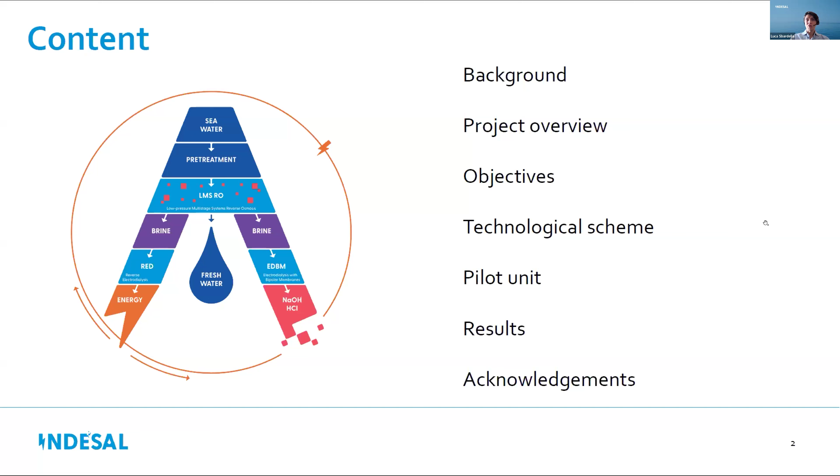I think in the context of today, most of us are well aware of the background of this and the need for a desalination project like Life INDESAL, due to increased water demand and the water scarcity we are facing in different regions of the world. We also know that there are several unconventional water resources that are becoming more conventional, let's say. Among them, desalination and seawater desalination is one of the most robust and efficient processes to supply fresh water.

In this framework, INDESAL aims to increase the seawater desalination sustainability and circularity. How do we plan to do that? By integrating three different innovative technologies.

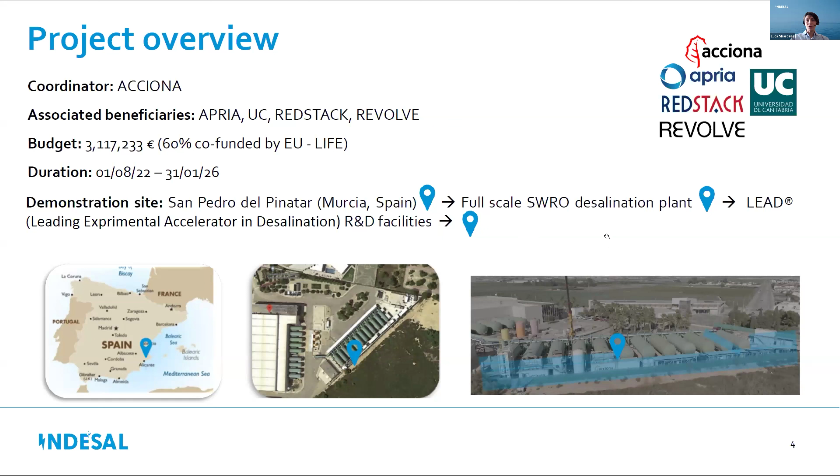In this slide, we can have a brief overview of the project. There are 5 partners. Acciona is coordinating, and with our company we are joined in this project, in this adventure, by Apria, University of Cantabria, Redstack, and Revolve. The demonstration site is based in the southeast of Spain, in a desalination plant operated by Acciona, where the innovation department of Acciona Water Business has its own R&D facilities with several pilot plants, among them the Life INDESAL.

So the main objective is to improve the efficiency and the circularity of seawater desalination with a novel integrated process. This process has, let's say, 3 pillars, each of them associated with a specific objective. So the first pillar is to increase the energy efficiency of seawater desalination, and the technology is the low pressure multi-stage reverse osmosis.

Some of the main features related to them: we have the LMSRO, which is basically a 2-pass multi-stage with shorter pressure vessels, which results in better flux distribution and also a more flexible and tailored CIP, so cleaning in place.

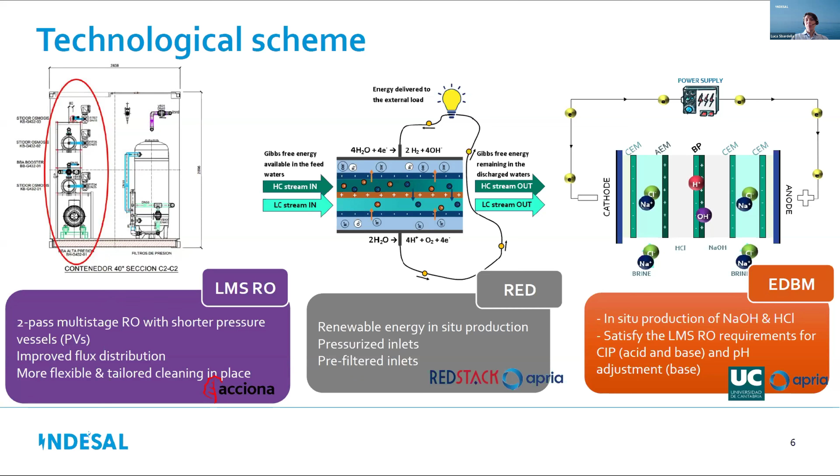We can have an in situ production of sodium hydroxide and hydrochloric acid to such an extent that allows us to satisfy the requirements for the desalination process, both for the CIP and also for pH adjustment.

So these three technologies, which I have just mentioned, are integrated together in a pilot plant which is highly flexible and modular. It's basically composed of two containers, a 40 feet and a 20 feet container, which are highly equipped and instrumented, and can be operated in such a way that allows us to obtain results representative of a full-scale desalination plant.

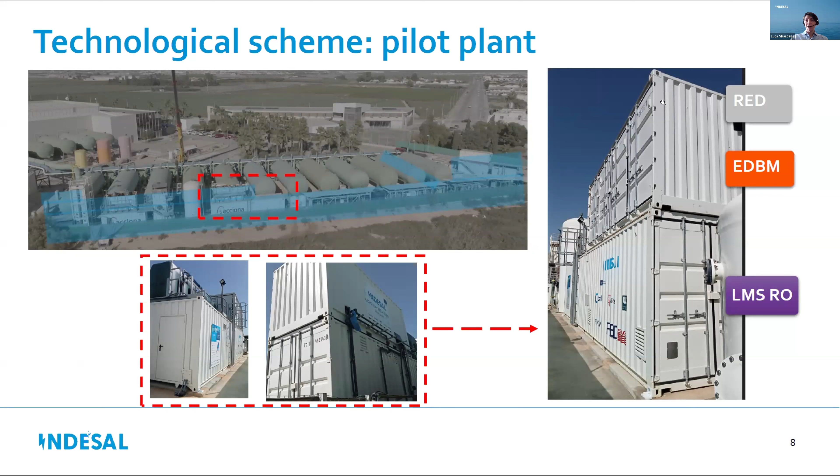In the first picture here at the top, we can see our R&D facilities, and in the red dotted box below, we have the INDESAL containers. In the bottom one, as we can see here on the right, we have the LMSRO. It's a 40 feet container, and in the upper one we have the other two processes, the RED and the EDBM.

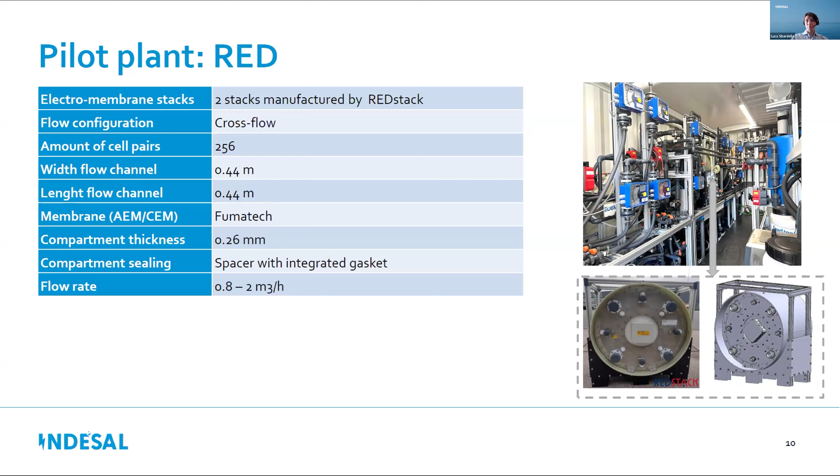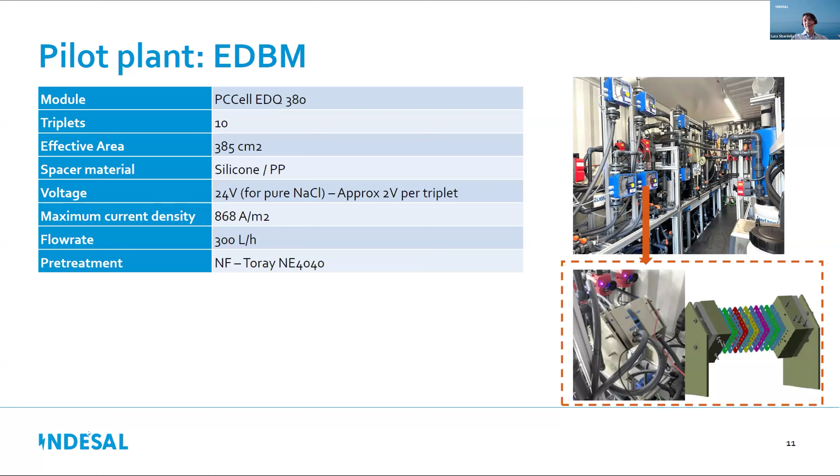Finally, as you can see, the picture of the inside view of the pilot is the same, because as I said before, the RED and the EDBM are located inside the same container. But in this case we have also the detail of the EDBM module, which is a PCCell module with 10 triplets and an influent flow rate of 300 liters per hour. So as we have seen, the highest flow rate is for the LMSRO, the intermediate one is for the RED, and the lower one is for the EDBM.

Once we had a look at the technological characteristics of these three pilots, we can look at some of the results achieved. In the case of the LMSRO, we treat Mediterranean seawater, which is properly treated by the pretreatment of the pilot, which is pressurized media filters, providing proper LMSRO influent quality with a turbidity and SDI15 complying with the characteristics needed for proper LMSRO operation.

Anyhow, we can achieve, from February, March, through the whole year the pilot was operated, very good quality permeate with an average of around 200 ppm of TDS.

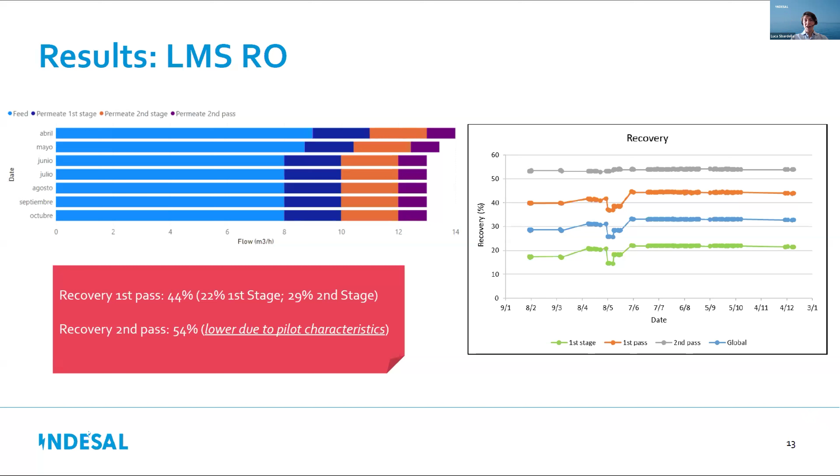As I said before, we also wanted to highlight the highly balanced performance of the LMSRO. As you can see in stage 1 and stage 2 of the first pass, we have almost the same flux on average. This results in highly balanced hydrodynamic conditions and also less energy losses. At the same time, we were very satisfied with the performance of this first pass LMSRO, which presented a very stable performance.

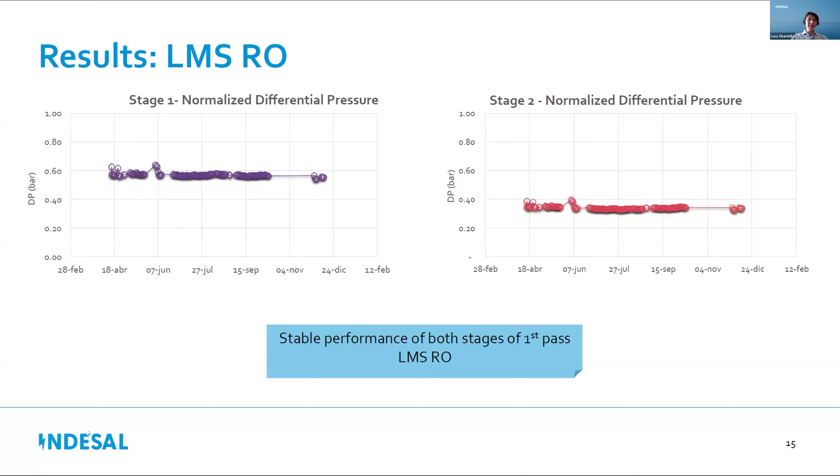So once we have seen the LMSRO results, unfortunately we cannot properly share continuous results from the other two technologies because at the moment they are not continuously operating. But it's anyhow interesting to see some of the preliminary results at lab scale, and also simulations, which were needed to achieve the final pilot plant design.

In the case of the RED, Redstack, who is the partner in charge of the design of these pilot units due to their expertise in such systems, has been evaluating different process operations with the aim of maximizing to the possible extent the energy efficiency of the process, and of course the power density as well.

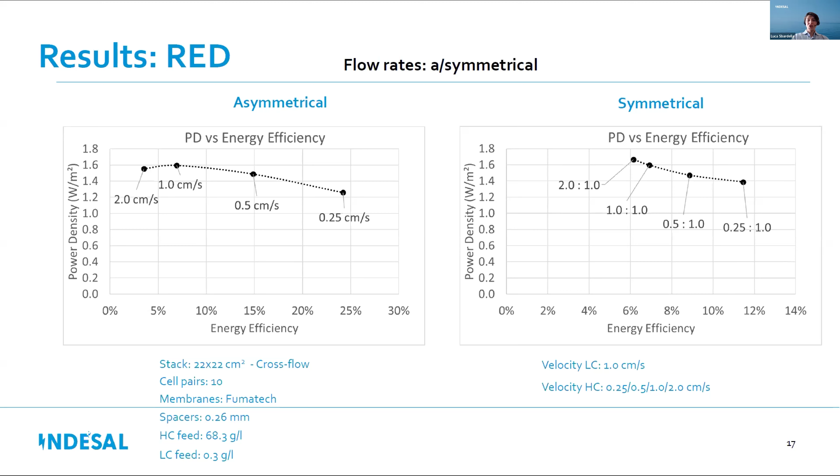These lab scale results were carried out in order to gain valuable insights for the follow-up task, which is the construction and design of the already pilot unit.

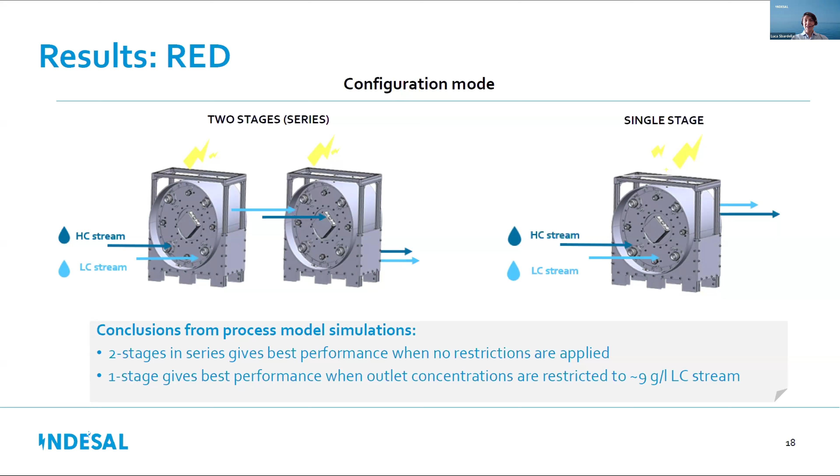And from this preliminary study, together with the associated simulation, we built pilot plants flexible in terms of configuration mode, which can be operated in 2-stage and also single stage. This is because we saw from the preliminary simulation results that the 2-stage configuration gave the best performance in terms of the energy yield achievable, while the single stage process can also be useful if we want to restrict the low concentration outlet of the RED process.

At the same time, this pilot is also designed and built in order to operate in recirculation and feed and bleed mode for the electrolyte rinse solution, because the idea of the project is also to achieve maximum energy with minimal or no chemical consumption at all.

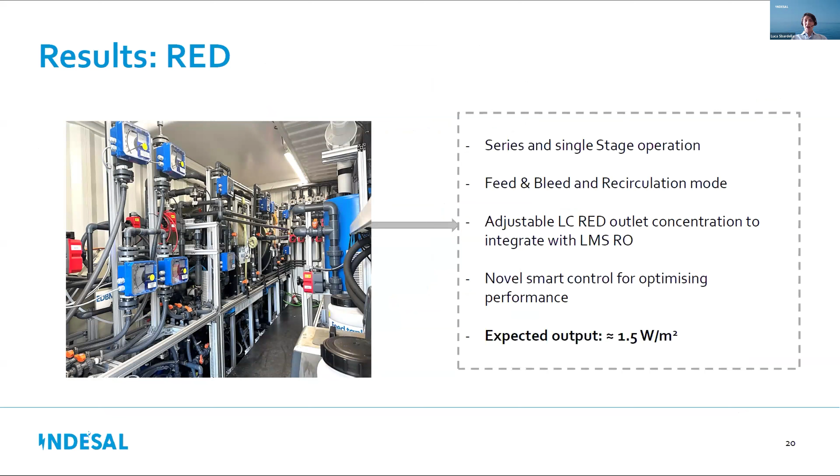So finally, the RED pilot has different and alternative operating modes. It also incorporates a novel smart control system for optimizing its performance, and we have an expected output of 1.5 watts per square meter. The similar context for the EDBM.

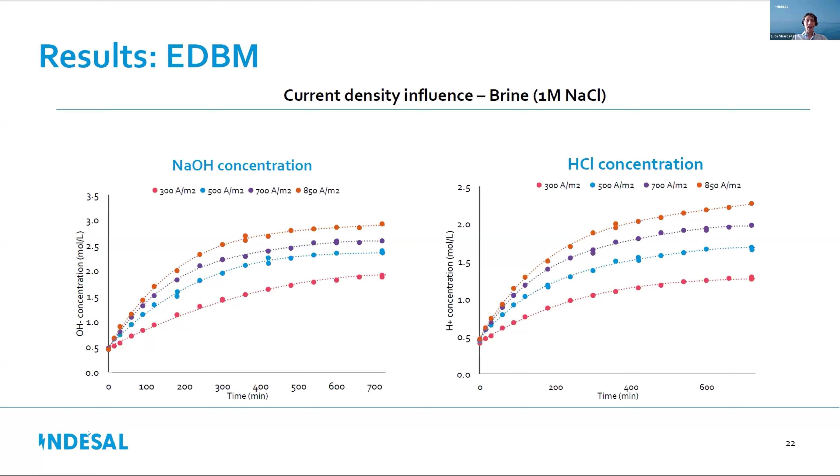Since this pilot is meant to be operated in a semi-batch way, we also have the advantage of operating at constant voltage, which in the case of 850 amps per square meter, we are at around 20 volts.

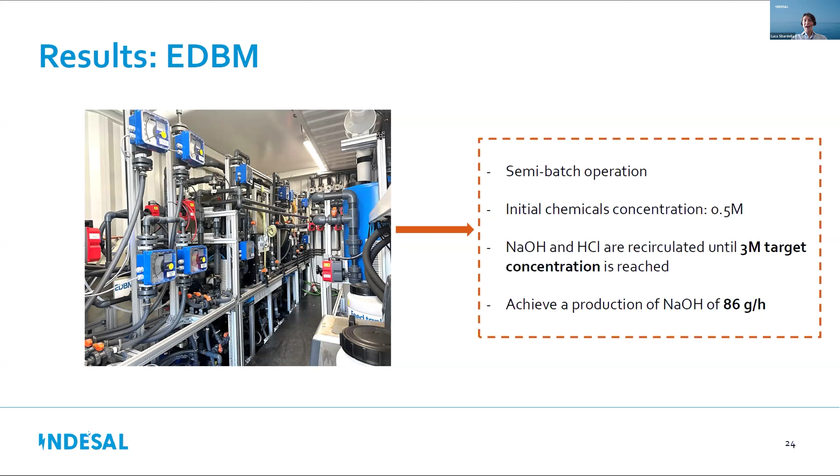So finally, the EDBM can operate in semi-batch mode. The idea is to start with an initial concentration of 0.5 to achieve a target 3 molar concentration, mostly for sodium hydroxide, and a production of 86 grams per hour of the alkaline stream.

Getting to the conclusion and some of the expected results from the pilot plant operation, we expect a specific energy consumption reduction of 0.2 kilowatt hours per cubic meter when we compare the LMSRO system with a conventional 2-pass seawater reverse osmosis desalination system.

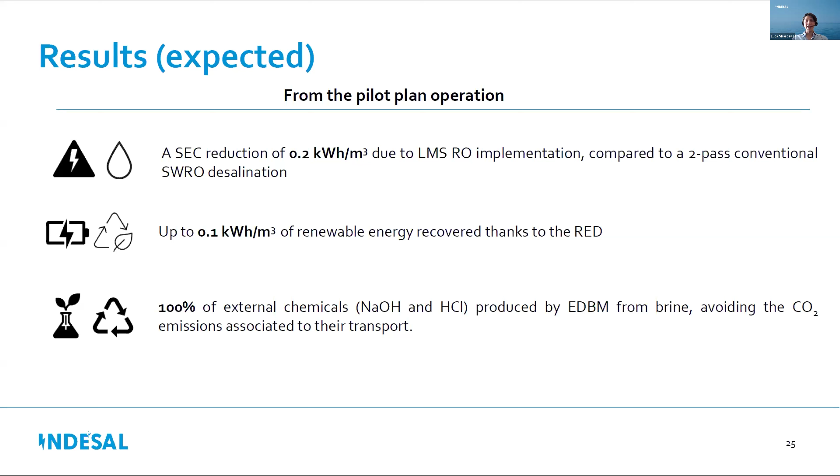We expect to achieve up to 0.1 kilowatt hours per cubic meter of permeate of renewable energy due to the RED, and to completely satisfy the need of sodium hydroxide and hydrochloric acid for the proper operation of the pilot, thanks to the EDBM process.

If we translate these results to a full-scale desalination plant, we will have a reduction of 33 gigawatt hours per year and the associated reduction of CO2 equivalent emissions, the production of 16 gigawatt hours per year, and a reduction of almost 4,200 tons per year of chemicals due to the brine valorization through the EDBM process.

First of all, don't panic, I'm not going back to the time of the ancient Greeks, despite my first slide. But I would like to remark that salted water has been one of the issues along the whole of humanity's history. Of course, the main technology was different stages of distillation processes, from the lower scale for villages, boats, etc., to the full scale that appears in the year 1930 in Saudi Arabia, in which the first big multi-effect desalination plant was built.

Following that, in the meantime, the United States Congress passed the Saline Water Act to support the funding of desalination in 1952. And in Qatar, the first desalination plant was built in 1954.

And what happens in the early 60s of last century? At the University of Los Angeles, Sidney Loeb and Srinivasa Sourirajan discovered that cellulose acetate film can separate salts. They found initially by chance that the cellulose acetate film covering cigarette packets could separate salts.

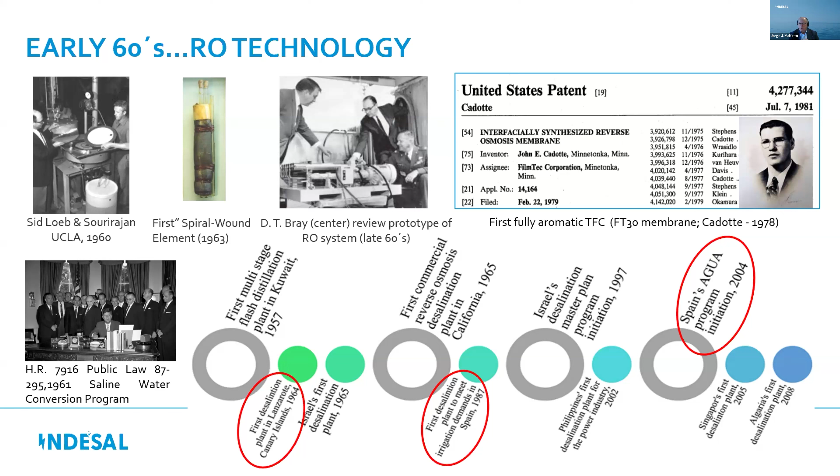If we follow the technology in Spain, which is the European country where reverse osmosis technology was first developed - as I said before, in 1964 the first desalination plant was built in Lanzarote.

In the 80s, desalination plants for irrigation were built. Construction of these plants continued through the 90s, and between 1995 and 2000 there was significant growth in installed capacity.

And in 2004, the AGUA program started. The current situation is more than 24 big desalination plants from the AGUA program working, and now we are starting to update these plants and increase production by expanding these installations.

This is the situation now in Spain: more than 765 desalination plants between brackish and seawater. 99 of these plants produce more than 10,000 cubic meters a day - 68 seawater and 31 brackish water. The biggest one is in Torrevieja, in Alicante.

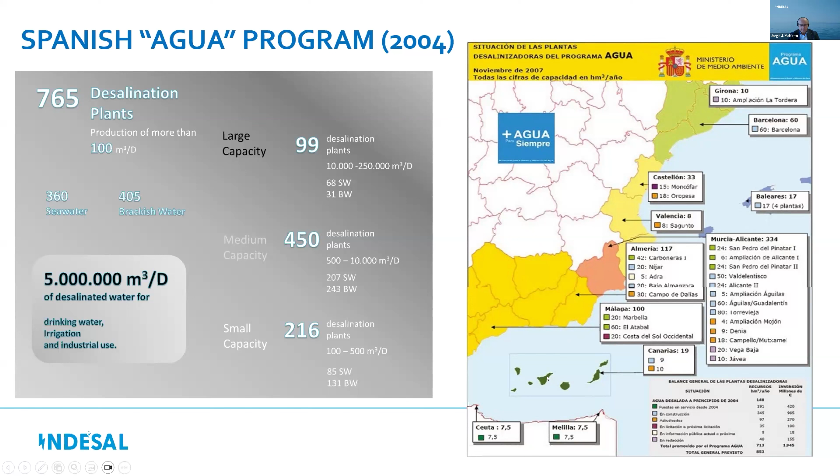Talking about desalination in the world, at this moment the predominant desalination technology is reverse osmosis. The Middle East countries traditionally built very big thermal desalination plants - multi-flash distillation, multi-stage desalination plants. But since 5-6 years ago, they've been changing to reverse osmosis, which has boosted the reverse osmosis market.

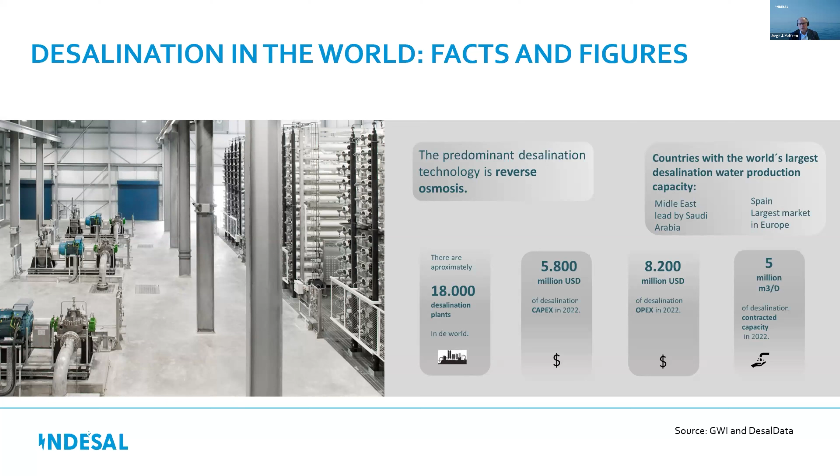For this reason, the Middle East leads reverse osmosis production, led by Saudi Arabia. Spain remains the largest market in Europe. In the world, there are more or less 18,000 desalination plants with a CapEx of 5,800 million US dollars, and OPEX around 8,200 million US dollars.

As you can see in the slide, membrane technology is predominant in the market. Thermal technology is still in use, but all new projects are focused on reverse osmosis.

They were awarded from the mid-60s to 2024, where around 110 million cubic meters a day were awarded worldwide.

Maybe the main issue is that the latest projects are huge capacity projects. At the beginning of this century, the biggest projects were around 100,000 cubic meters a day, up to 240,000 cubic meters a day, as in Torrevieja.

But now they are building plants of 900,000 cubic meters a day, or 800,000. So very big projects. The latest major project is in Casablanca, Morocco, where Acciona is going to build an 830,000 cubic meters a day seawater reverse osmosis plant.

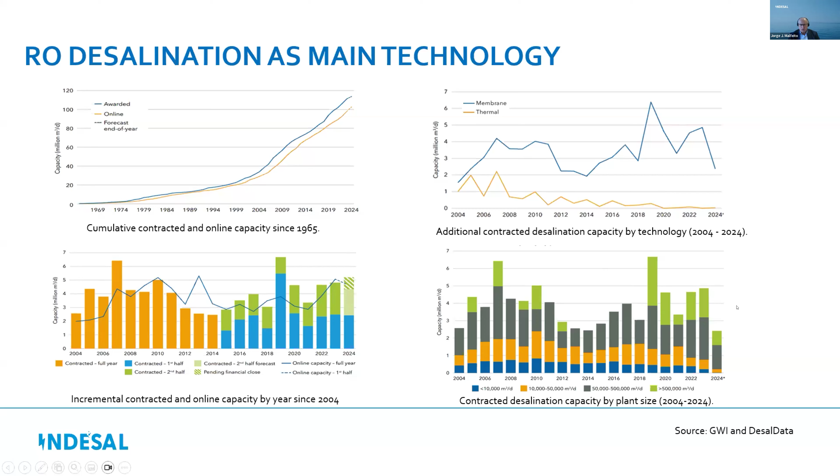If we analyze the cost of MENA projects in terms of price and specific energy consumption, we see a great evolution in water price. We come from 1.2, 1.3 dollars per cubic meter in the early century, to prices in 2024 like Saadiyat in Saudi Arabia, around 0.72 dollars per cubic meter, or Casablanca, about 0.46 dollars per cubic meter.

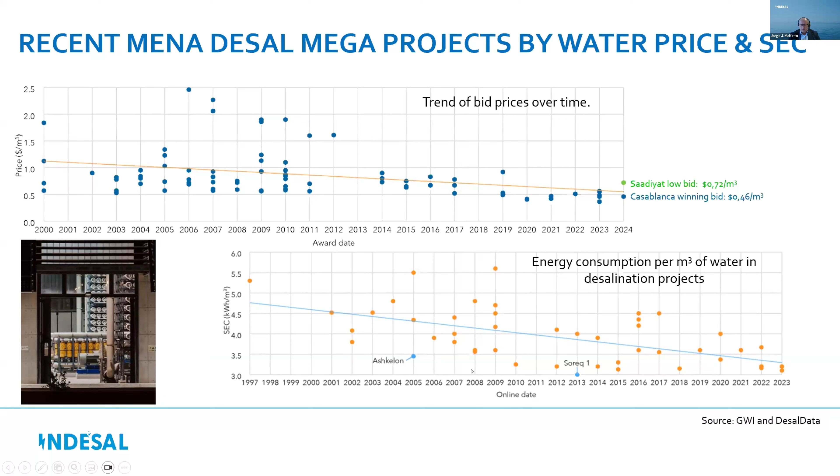What about innovation trends? At this moment, innovation in desalination and reverse osmosis in general focuses on producing higher flux membranes with higher recovery rates. Of course, economies of scale play an important role.

Achieving these prices is only possible if we build very big desalination plants. Also, new process configurations can help minimize costs. Application of renewable energies, addressing biofouling, brine concentration, mineral recovery, and digital innovation are key.

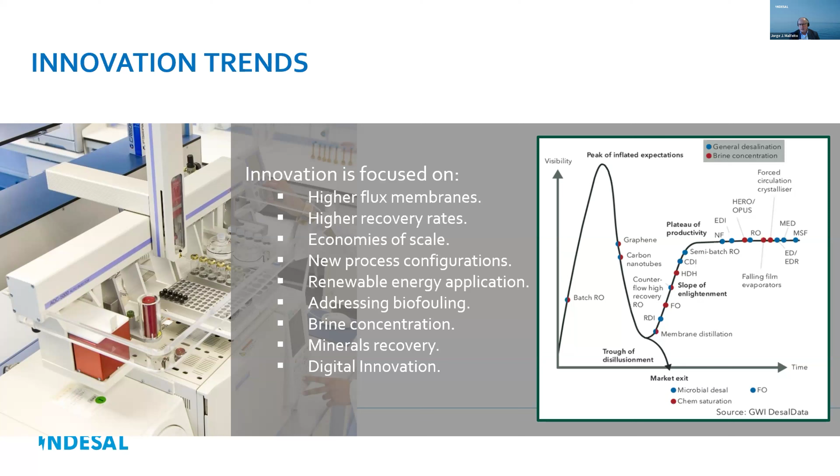This is one of the focuses that all the companies are working on. Digital innovation is also going to play an important role in the near future.

And I think this is all. Thank you very much for your attention, and I'm open for your questions.

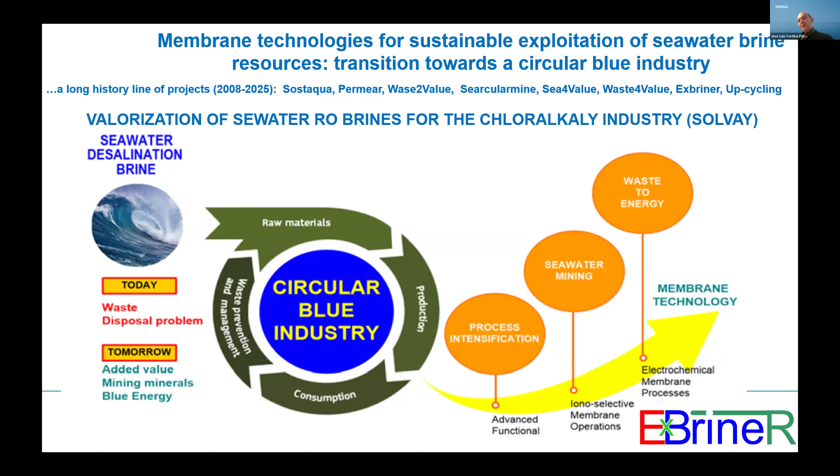I was reviewing that maybe we are prisoners of this, or maybe it's because we love brine valorisation. For example, we have this new Marie Curie program project for PhD students. But I remember that the first project we did on valorization of brines was back in 2008, where we were evaluating the possibility for a chloroalkali company to use brines from an RO facility just as a source of sodium chloride for the chloroalkali industry.

At this stage, the technology for reusing brines from RO desalination plants, or just from seawater, was developed in the 60s or 70s. In Japan, as they don't have access to rock salt, they developed the use of electrodialysis: you get seawater with 35 grams per liter sodium chloride content, and you need to concentrate it to more or less 25%. After that you should not continue concentrating by ED, and then you go to mechanical vapor compression to produce salt for table salt production or other uses.

We demonstrated using desalination RO that the commercial target objective is to achieve brine concentration of let's say 25% sodium chloride, with electrical consumption for this stage of less than maybe 150 kilowatt-hours per ton of sodium chloride transported.

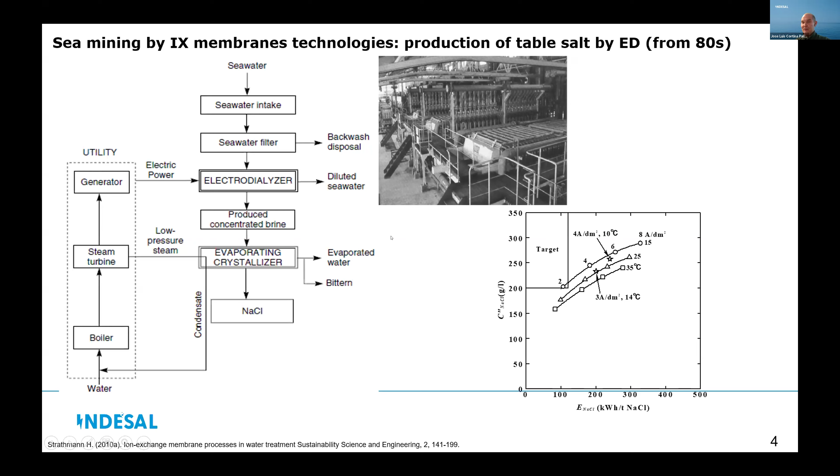But this technology was disrupted by Rio Tinto, because they started producing salt in the northwest of Australia using natural evaporation. That was really not good news for the industry, or especially for the producers of ion exchange membranes, because the market decreased exponentially.

But we have very good news, because in recent years pressure-driven technologies - high pressure RO, ultra high pressure RO, osmotically assisted RO, low salt rejection RO, high pressure NF - have demonstrated that after the desalination plant, we need to concentrate the sodium chloride again. In the case of seawater, maybe you start at 7% sodium chloride, and if you want to produce very high quality sodium chloride for use in the chloroalkali industry, you use mechanical vapor compression to get sodium chloride with purity acceptable for that industry.

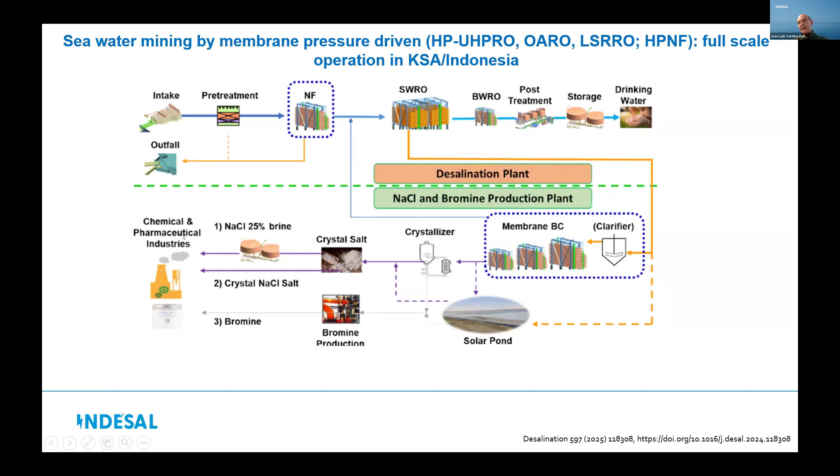In that case, the business case will be a desalination plant producing around 6 million cubic meters of fresh water per year. This will provide the possibility to recover 200,000 tons of sodium chloride and close to 9,000 to 10,000 tons of magnesium hydroxide per year.

But the question is, apart from using those technologies to produce sodium chloride, are membrane technologies suitable to produce other chemicals? We saw in Luca's presentation that the production of chemicals, either acid or base, is typically done by the chloroalkali industry: you start with sodium chloride and get chlorine as a byproduct, as well as hydrogen, and then caustic solution around 30% if using membranes. If using diaphragm technology, you get similar values, but the sodium hydroxide produced is more diluted.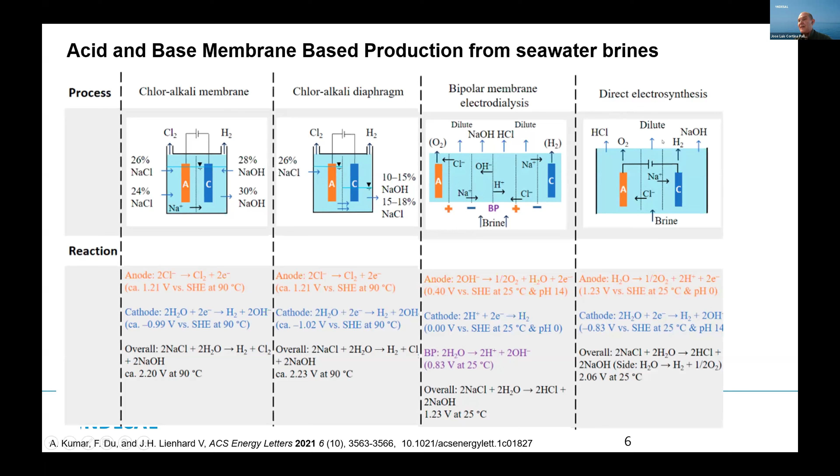But if we review what happens in the case of using bipolar ED, a bipolar membrane is just a cation and anion exchange membrane stuck together. In the interlayer between these two membranes, you basically have water, and then you could not be using the energy you apply at different voltages to this system.

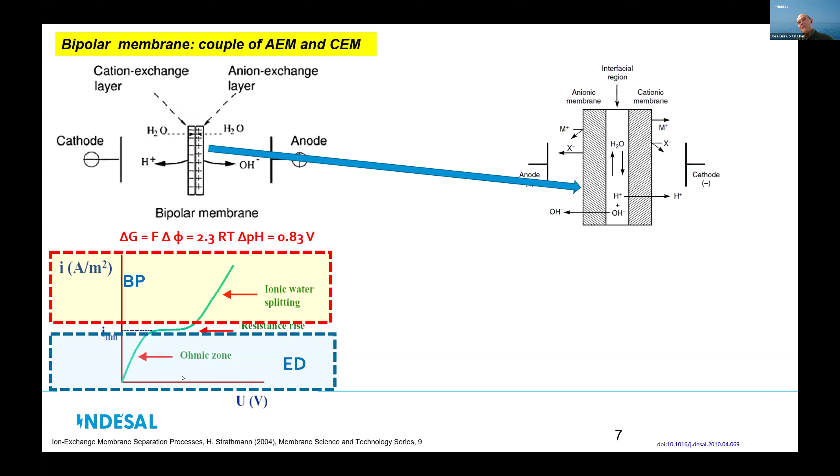The energy is not used for transporting ions, and then you reach this area where the energy you are applying is just used to do this reaction of ionic water splitting, transforming the water molecules into protons and hydroxide ions, which are then transported through the cation and anion exchange membranes. You could build this if you want to produce acids and bases.

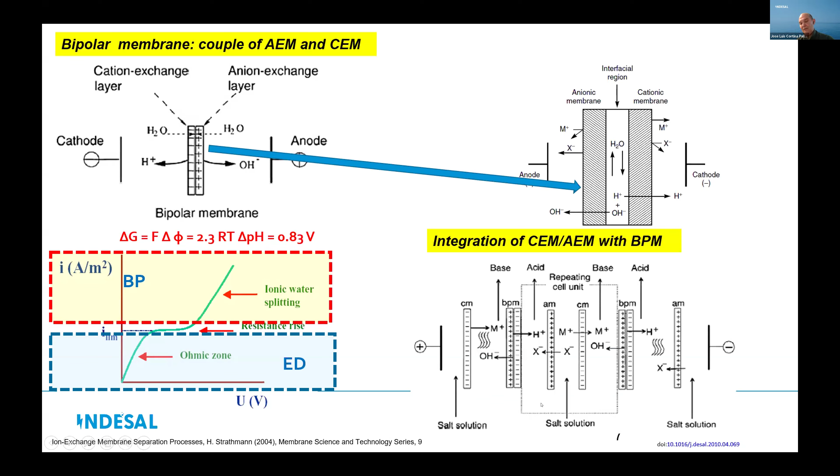Like this basic unit, when you have the bipolar membrane, you also need a cation exchange membrane and an anion exchange membrane just to produce, in that case using sodium chloride, sodium hydroxide and hydrochloric acid. But is this very, very new?

I would say no, actually, we already have one thesis by Monica Reig from more than 10 years back, where we were demonstrating this, getting the brines from our RO. It was a question and is very relevant: you need to remove calcium and magnesium levels if you want to avoid problems afterward, either in the ED or in the EDBM stage, because the recommendation from some companies is that you should not have more than 10 milligrams per liter of calcium and magnesium.

But this is something that has not been fully demonstrated. I would even recommend having values of calcium and magnesium maybe below 1 milligram per liter.

And when we were doing this project, we were facing the issue that we were only able to reach, at maximum, let's say 2 molar sodium hydroxide or 2 molar hydrochloric acid. This is only 4 to 8% in weight for those two solutions, far away from the 30% typical reagents that the chloralkali industry is commercializing.

And the fact is, when you are analyzing the amount of sodium hydroxide that you could produce from the brine generated in a desalination plant, the numbers for the use of chemicals, especially hydrochloric acid or sodium hydroxide in a desalination plant, is not really very high.

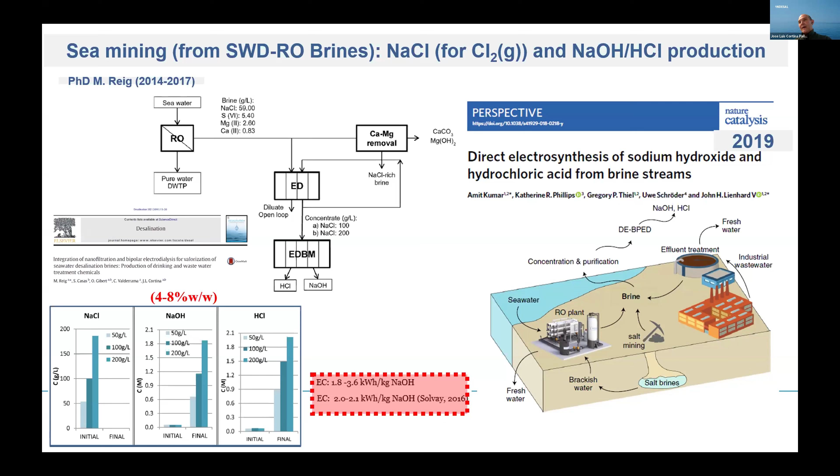Some years later, this paper was published that is highly cited, even though they did not have any experimental data on either. This group from MIT was supporting the possibility of producing sodium hydroxide by direct electrosynthesis from sodium chloride.

And the fact is that when you compare the limitations, let's make a comparison of the theoretical and the practical energy consumption when using all these four possibilities, just estimating what is the energy required. Here we have a summary where, as described previously, the theoretical value, in green, is less than 2 kilowatt hours per kilogram of sodium hydroxide, which is the value the industry is reaching.

When you go to bipolar ED, even though the theoretical value predicted is lower than 1, the reality of the values reported in the literature arrive even at 3.6, which are the values we were reporting in the thesis of Monica Reig. And there is no data related to the use of direct electrosynthesis.

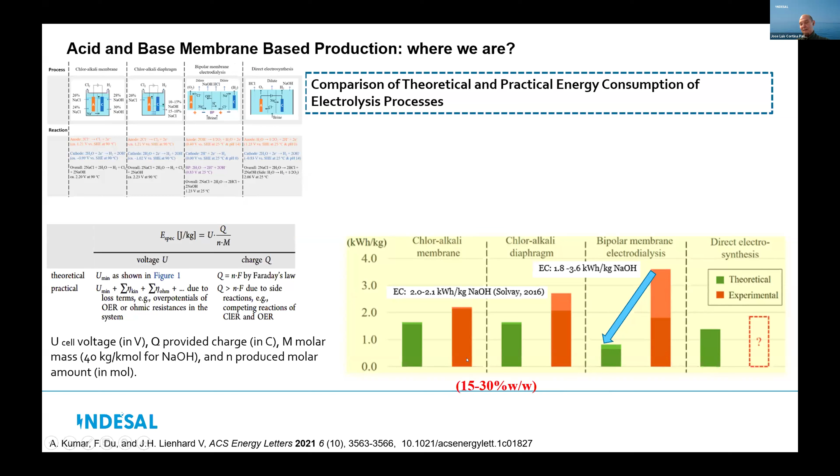Okay, then I will show you what efforts have been made in recent years to decrease this energy consumption, to make the product you are generating more marketable. Finally, the goal is to reach, or approach as much as possible, the values at which sodium hydroxide is produced by the chloralkali industry — much better or much easier for the possibility of putting it in the market.

Okay, I will explain, since I don't have much time, two efforts. One was developed in our group in recent years by Tamara Leon, who was working on ED bipolar from sodium chloride solutions. One possibility was to optimize the operation.

Apart from evaluating the possibility of increasing the current density, we focused on two things: optimizing the concentration of sodium hydroxide by playing with the ratios of the volumes of your reservoirs in the ED stack from the salt and from the base produced, and finally the possibility to use a feed and bleed configuration, especially if you're able to increase as much as possible the sodium chloride in your starting solution.

We were able to reach close to 5.5 molar sodium hydroxide, that is close to 18% by weight. Those are different examples as a function of this experimental evaluation of the different ratios of containers or the use of current density.

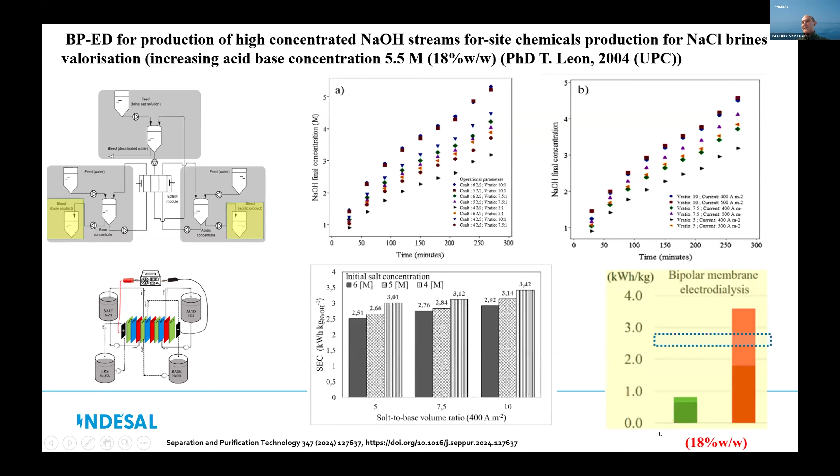If we analyze the specific electrical consumption, increasing the starting sodium chloride solution, working close to saturated even up to 6 molar, we were able to reduce values from initial 3.4 kilowatt-hours per kilogram to close to 2.5. We're still not reaching the 2 or less than 2 reported for the chloralkali industry, but I think it's big progress if you increase the sodium chloride concentration as much as possible. Reaching 18% content is maybe half of what's produced by the chloralkali industry.

But when you do that, you run into a big problem with the transport mechanisms in an ED or bipolar ED stack. Apart from the typical electromigration, electroosmosis and water dissociation, when you increase concentration there's back diffusion - the Donnan exclusion mechanism stops working, and then you have a big problem with proton leakage, with protons passing through the anion exchange membranes, and OH leakage to the cation exchange membranes. Apart from that, you could have transport of cations or anions through the bipolar membranes into the containers.

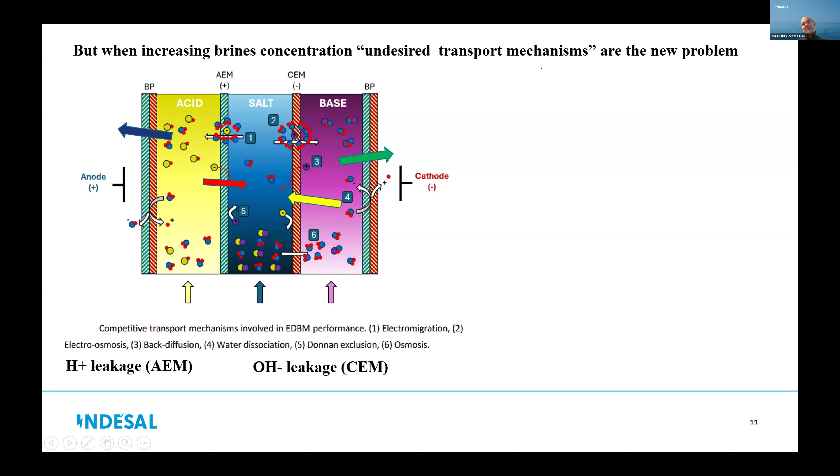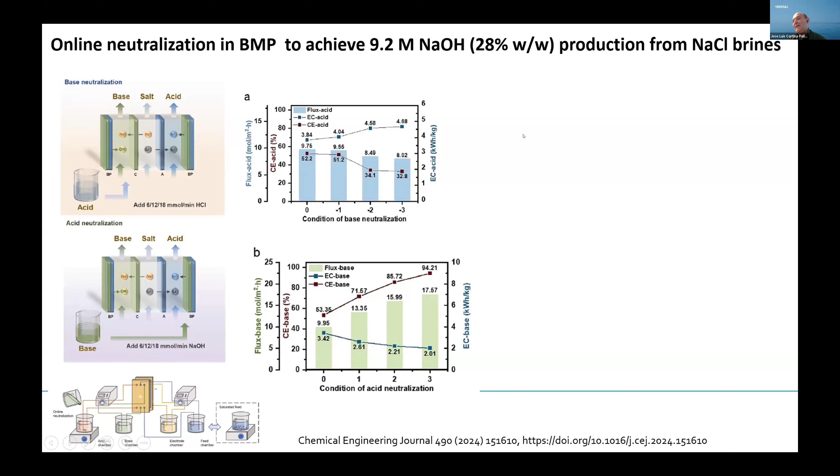Here you have the energy consumption values, diminished to close to 2 kilowatt-hours per kilogram. Additionally, they report current efficiencies that are really, really high, close to 94%. They compared all results published in the literature over the last 10-plus years, and this is probably one of the lowest values in electrical consumption and also one of the best in terms of current efficiency.

So now we are approaching 2 kilowatt-hours per kilogram of sodium hydroxide, and we were reaching 28% - 28% is like 9.2 molar sodium hydroxide, approaching the 30% concentration you could find in the chloralkali industry.

So what's next? As a summary, I think we need membrane providers to improve the chemistry - they're using chemistries that are maybe from the 90s. Industries using ED bipolar expect to be working at over 1,500 to 2,000 amperes per square meter. We need to reduce proton leakage, we need to reduce hydroxyl leakage, and we need to deal with the problem of divalent ion scaling that was mentioned in the previous presentation.

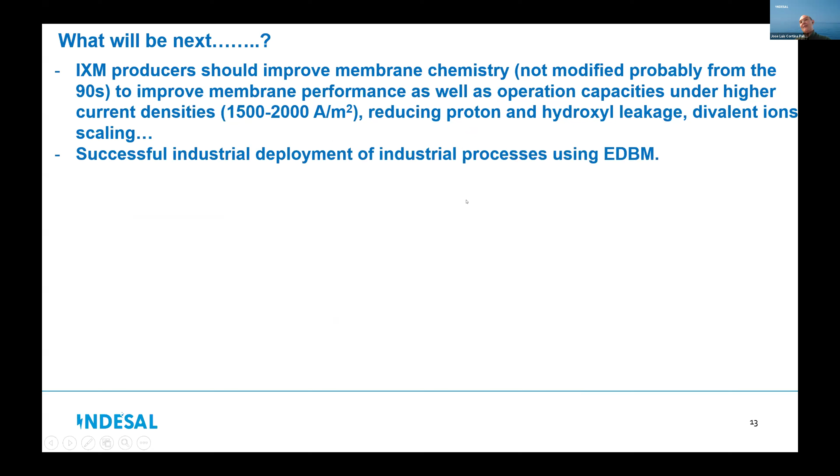I think it's helping that there will be full scale application using ED bipolar very, very soon.

But for me, even most of the people working here are related to the seawater RO business. I think the most successful applications will be appearing linked to the mining industry, where the mining industry is using huge amounts of sodium sulfate.

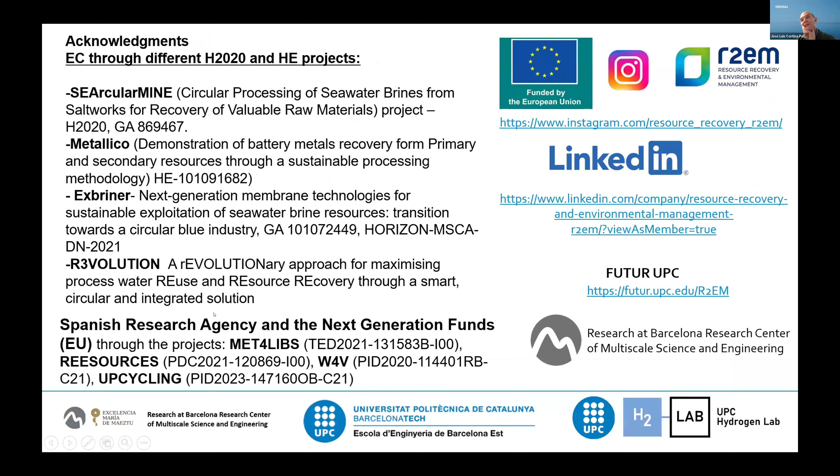There is no market for this chemical, and the only way to make this project reliable is to use ED bipolar to reuse the sulfuric acid in the leaching stage and to use the sodium hydroxide in the neutralization stage to produce either lithium hydroxide or lithium carbonate.

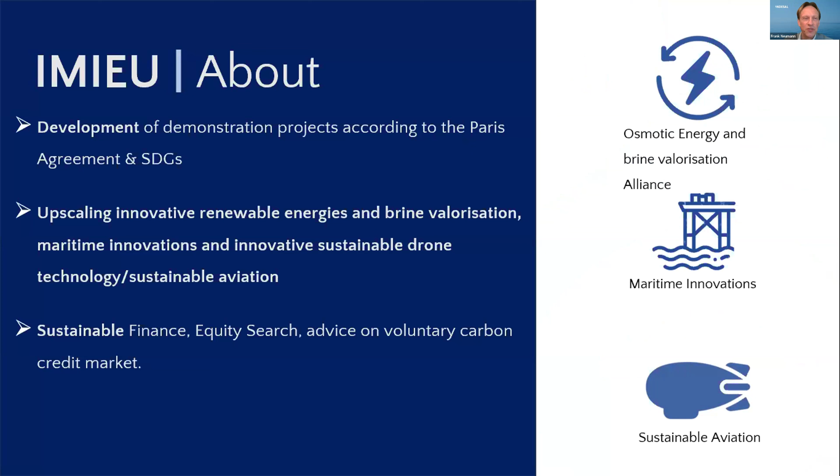From lab to market, as I said, it's not an easy journey. Our organization, Institute for Infrastructure, Environment, Innovation, has long-term experience in upscaling innovation processes, particularly in 3 fields: renewable energies and brine valorization, maritime innovations, and lastly drones for sustainable aviation and environmental monitoring.

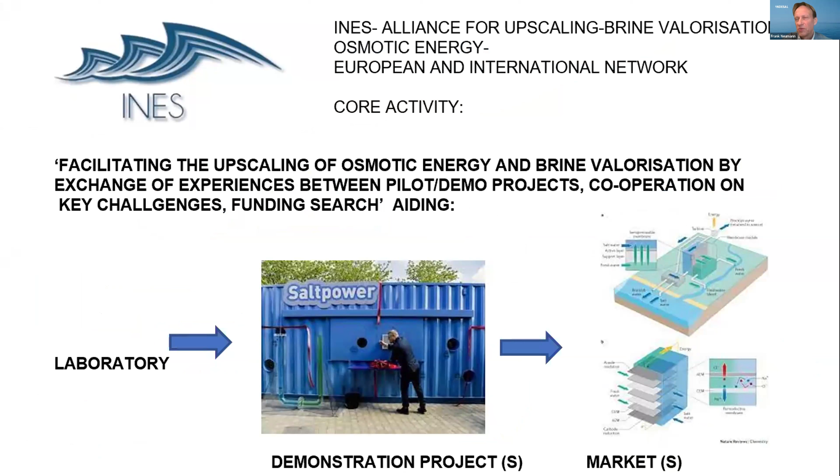As I said, the upscaling process from the lab to the market is not an easy one. There are a lot of challenges. In my presentation, I will briefly touch upon the lessons learned from some of the osmotic energy pilot projects over the past 10 or 15 years.

Very briefly, I do not need to tell this audience, I think, but as IMIEU we've seen that particularly upscaling is not an easy trajectory. And although in a lot of descriptions of European grant programs and equity investment programs in renewables, we always see that they want bold plans and upscaling in 2 or 3 years.

The reality is really different. We see in our experience that it's more like 8 years, and maybe even a bit longer, to stay for the best results in commercial upscaling. You see some other points here, but I will not go into them for time's sake. Maybe we can do that in case there are any questions.

So maybe a very short tour of osmotic power plants running from 2009 to the current year, 2025. This tour is not complete, certainly not, and it's also not so much quantified, as a lot of these startups and ventures do not always publish all the actual results.

And maybe also a small word of thanks here to Valladolid University, because together with the University of Valladolid we have started a European and global overview of osmotic power plants. And this study, as you will also see from this presentation, is not finished yet. It's kind of halfway, because it's not easy to get the information.

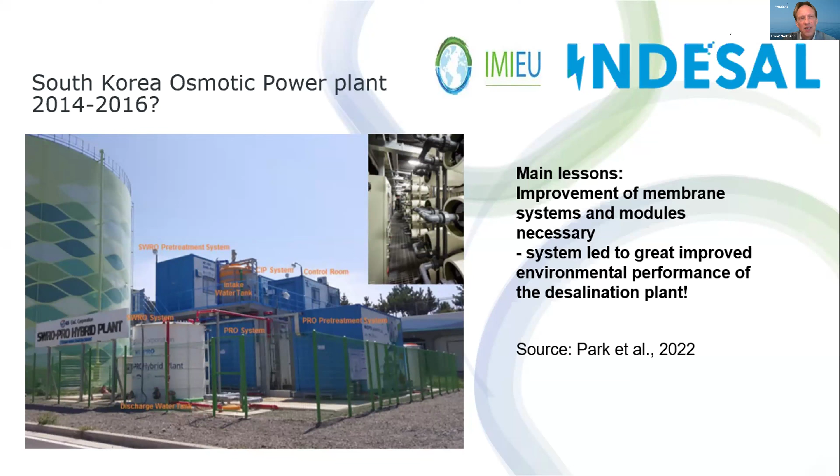At this moment, works are going on to have a follow-up of this project after quite a long pause, also during COVID, with several actors, using input from the experience in labs in the Singapore institutions. I cannot say much more about this because it's all still in development, the follow-up of this plant together with Korean and Singaporean actors. But I think something may be known about this in maybe the coming year.

Another plant that is still functioning, and functioning well, is the Saltpower pilot plant. In this plant, brine from a salt factory is used as input, and as fresh water, processed water from the salt production site is used as input.

Here there were a lot of adaptations to the membranes and modules, and now the current pilot is quite large, going up to 100 kilowatt. At this moment, commercial applications are further being looked into, notably also from salt caverns used for gas storage, but this is still under development.

I will not talk very long about this project, but it's a very important project also for Life INDESAL, because Life INDESAL is basically building upon some of the experiences of the partners involved in the REAPower project. I think one of the key projects in the development of osmotic power production combined with brine valorisation. Professor Cipollina is a speaker later in this webinar, so he may tell more about the background of this project.

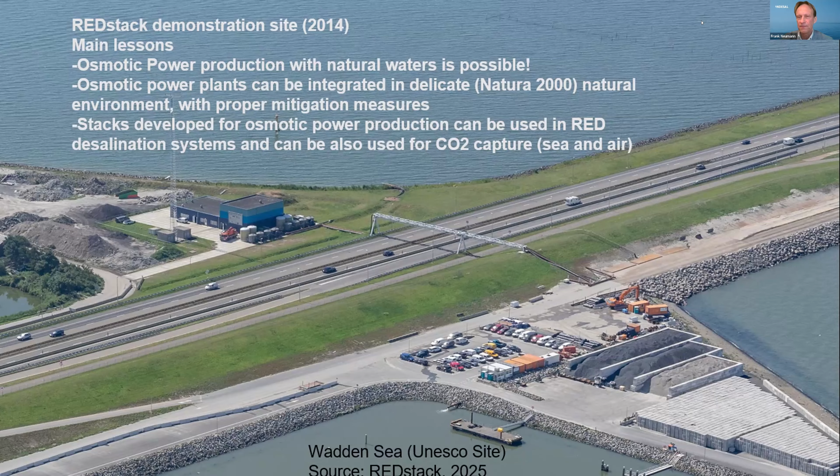And what's also very important is that, like REDstack, it's also based in a Natura 2000 site. So this also demonstrates that osmotic power production can be perfectly sited in a protected natural site.

And that's the newest. As you would say in Holland, hot from the needle, is the pilot site of osmotic power production using the RED system in Colombia, in Barranquilla. This site's development started in November 2024 and is supposed to be finished in the coming months. This is the first time, actually outside of Europe, in Latin America, that there is an osmotic energy pilot site.

On 3 June, there will be a meeting in Brussels, by the way, where some of the developers and the main designers of this site will be present. Also important to know, I don't have a nice picture of it, but the freshwater comes from the Magdalena River, which contains a lot of sediments, and the saltwater comes here from the Caribbean. So, quite a challenging location.

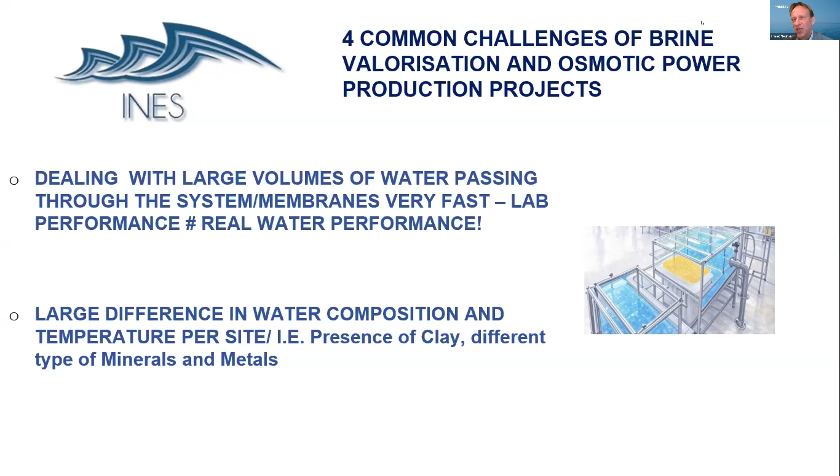Second point is, of course, what is very important, and we see this also in experiences from some of the developers, is that the one water is not the other water. The seawater of the Mediterranean has a very different composition than the water of the North Sea and of rivers, for example. So each time it's not possible to have just one ready-made solution for all water. Each time osmotic power production sites need to adapt and tune their systems to the composition of the water that is present. So that will be a challenge, and that is an item that needs to be further developed.

Just as an illustration here, you see some differences between the Mediterranean and the Wadden Sea. But of course, this is also true, for example, for differences between the Pacific and the Mediterranean. So each time, it's very important for osmotic power plants that the systems, the modules, the membranes, and the whole water management system need to be tuned to the composition of the waters.

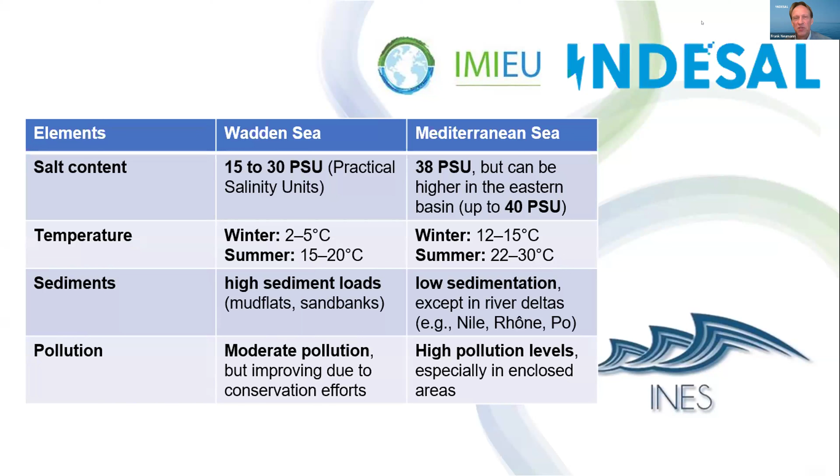As mentioned here one more time, also among the other challenges being conquered right now is efficient water pretreatment. I think the current state of the art here is a lot better than it was in 2009. The developers have really found smart solutions to this point, water pretreatment. I think both RedStack as well as, for example, Sweetch Energy, have found good solutions for water pretreatment, apparently.

I've also been asked to say something very briefly about European policies. I will not talk very long on this, don't want to bore the audience here. Maybe you see them all here. What's very important is that the lights of regulation and policy are at the moment very high and bright green for both brine valorisation as well as osmotic power production.

I will not go into all of them here, but maybe important is that osmotic energy production is recognized at the EU level as an innovative renewable. That was recognized in the adoption of the Renewable Energy Directive, the RED III, as you see in the picture here. But I think the more important ones here are the Critical Raw Materials Act, which facilitates, for example, brine valorization a lot, particularly for critical raw materials like rubidium, magnesium, but also others.

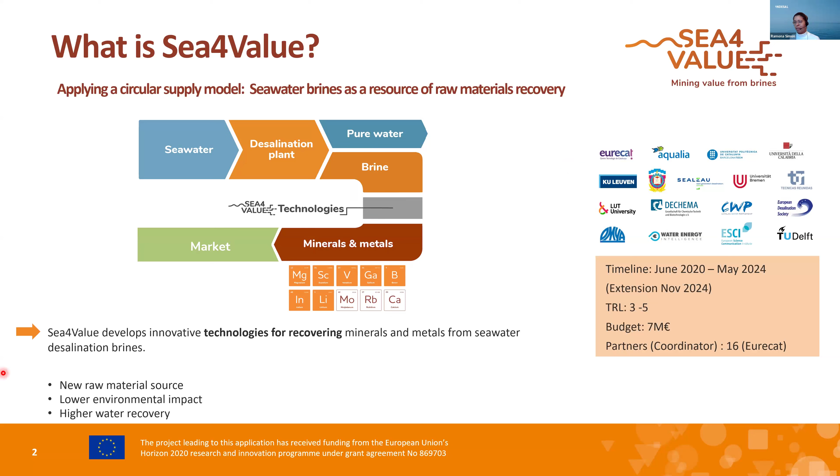So what have we done in Sea4Value? We developed 10 technologies. You can sort them into 3 main blocks.

So the first technologies were about the pre-treatment of the brine. Then afterwards, technologies were developed for the concentration of the brine. And then technologies for the selective recovery were developed and further improved.

This was done in the first time of the project, and afterwards there was the question, how can we combine those technologies? So we set up a moving lab to demonstrate the process, also working with real brine. The moving lab was on the site of a desalination plant on Tenerife in Adeje, and there all the technologies were then tested in a process.

And besides the technological developments, we also had a lot of assessments, exploitations, and further insights in the project. So we have done, for example, a market analysis and market requirement analysis to see in which sectors could the minerals and metals recovered be used, so that we can have a closer look into the market insights.

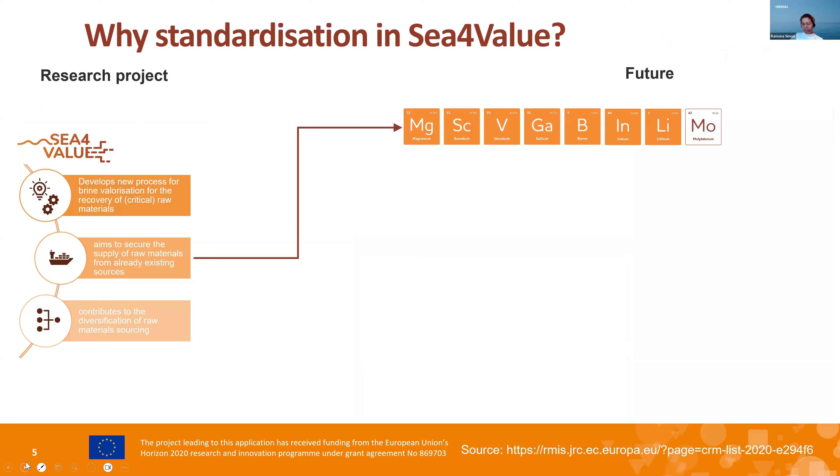So we have done a research project. We gained a lot of knowledge from all these processes that have been developed, but also from the sustainability assessment and the market insights. Our goal was then to transfer our results into the future, because in Sea4Value, the target was to recover a lot of critical minerals and metals, which are needed in future in many different key technologies, which will support us to facilitate the green transition.

So you see the Sea4Value minerals and metals can be used in batteries. We will use them in fuel cells. The whole renewable energy sector will use Sea4Value minerals and metals, and therefore we have to somehow create the transfer from the research project to the future.

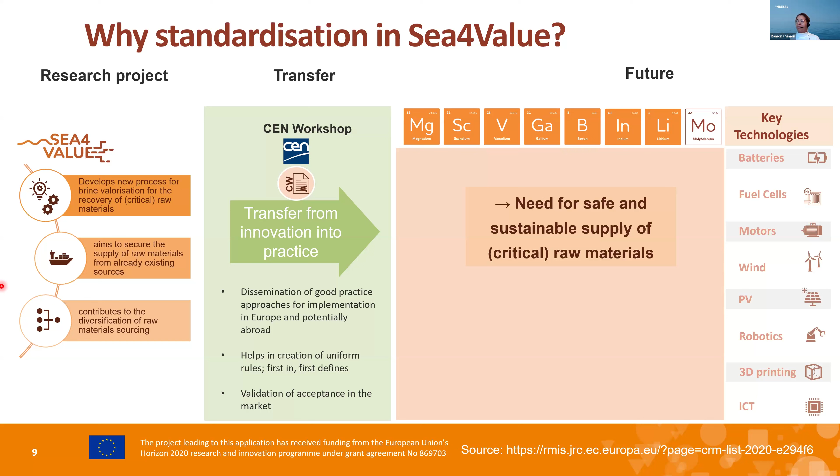A CEN workshop is, let's say, a soft standardization measure which can help bring the transfer from innovation into practice. So the goal was to create uniform rules, also to create a general language about brine valorization. And the great thing about CEN workshops is first in, first defined, so we could really make the first standardization approach to brine valorization. Our goal was to create more acceptance in the markets.

So what is a CEN workshop? First of all, it's not a single workshop. The term workshop is a little bit confusing, but CEN is the organization of all national standardization bodies of the European Union and the EFTA countries and Croatia.

Here on the right, you see how this institution is built up. You have CEN, where all the national bodies are part of, on the European level. On the world level, you have ISO, also quite known. And on the national level, we worked in this case together with UNI, the national standardization body of Italy. This is how it's built up, and there's only one CEN in Europe.

So what then is a CEN workshop? A CEN workshop represents the consensus of all the involved stakeholders, written down in one deliverable document. The process is organized so that everybody who is interested can join this consensus process, and it's a public process. You announce the document, and then everybody who's interested can join, and then this community builds up the document. As I said, it's not a full standard, but at the same time it shouldn't conflict with standards, because if you're making a standard, there should only be one in this direction.

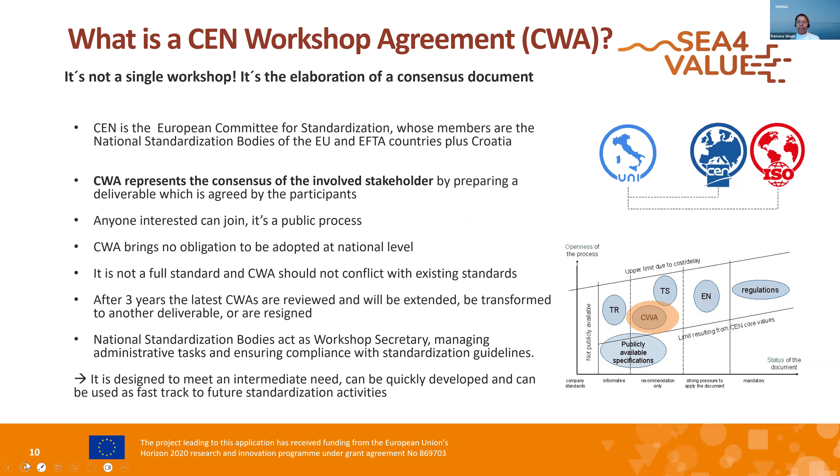So we can, for example, go from recommendation-only to a European norm, but this will be checked after three years to see how the path should go. So this is in brief what the CEN workshop agreement is about, and we were very glad that in Sea4Value we had the opportunity to put all our knowledge inside.

So how did we proceed? We started in the Sea4Value consortium to think about what kind of topics could be very interesting, what advice we could give. Then we worked with UNI as a secretary, and we wrote a proposal. The proposal was published, and then we could collect comments. Afterwards, we started with our kickoff meeting.

Then we went into the elaboration phase. This is how this procedure goes on. In our case, we had 53 experts working on this document for 8 months. We had a lot of meetings for that.

After those 8 months, we found a consensus on all the things inside the document, and in November '24 we published the document. It's now an open access document with a lot of pages, 57 pages today.

So now the question, what is inside this document? I'm going to represent the consensus that we found from all those 53 experts. The structure of the document has a formal part, which is very important, with the terms and definitions part, where we defined a lot of terms around brine valorisation.

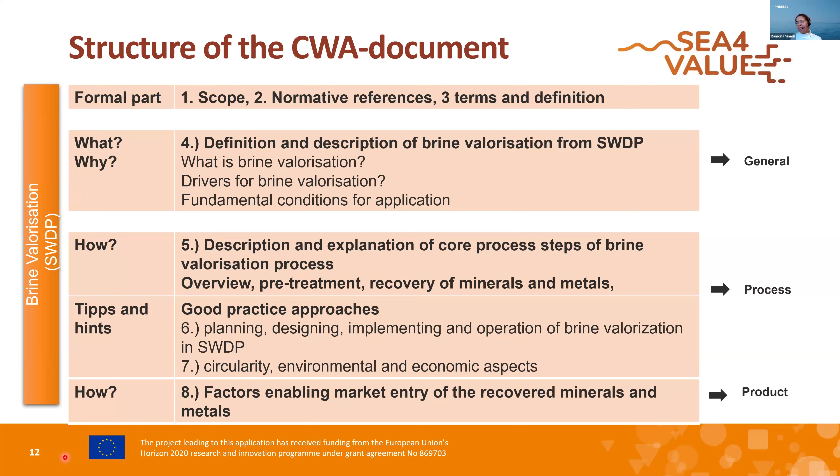So as you see, 57 pages is very long, so I try to just pick out some insights of the document. And we would start with the fundamental prerequisites. So what are the conditions to do brine mining?

Of course, you should have a sufficiently high concentration of the minerals and metals so that it's worth it. And you should always check if it's economically viable, so the cost should be outweighed by the revenue from the minerals and metals. You should also consider what kind of extraction technology you need, the energy sources and the energy costs.

And of course, you have to know the market prices of the minerals and metals you are going to sell. At the same time, you also need to know what quality of raw materials you can deliver for the market. Another fundamental condition is that you should be compatible with the existing infrastructure.

You also should look at what kind of infrastructure is around your plant. Can I transport my raw materials, for example? Do I have a good water supply? Do I get electricity? And so on.

And the other part is you also should look for risks, what kind of risk could potentially come to you. Therefore, we recommend having comprehensive risk management, also to check if the raw materials markets are fluctuating very strongly, and how you can deal with these uncertainties.

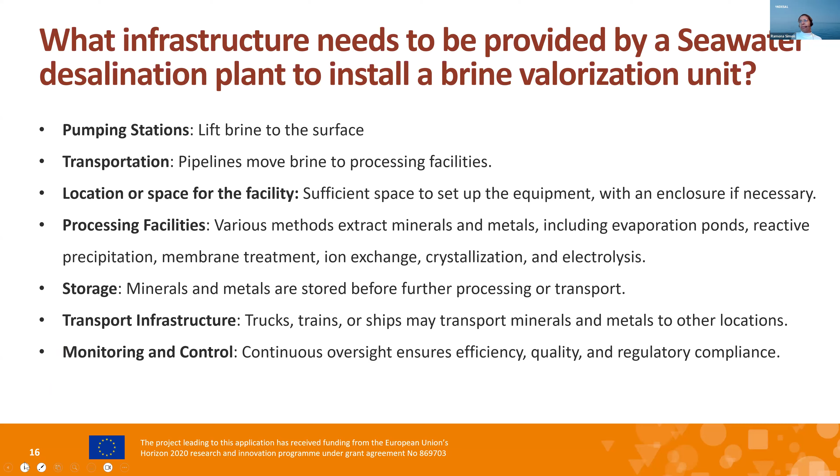If we look into the technology process, we defined what core process steps are there in brine valorization, and we said however my brine valorization step looks like, I always have those 4 points: brine pretreatment, a concentration step, then compound recovery, and if needed, compound purification. These are the 4 elemental steps that we have defined.

For those steps, we looked at what kind of technologies, for example, can be used to recover critical raw materials. As you see, we have a lot of technologies which were discussed also today that can be used for that. So it's not a must, but the choice depends on what kind of minerals and metals you'd like to recover.

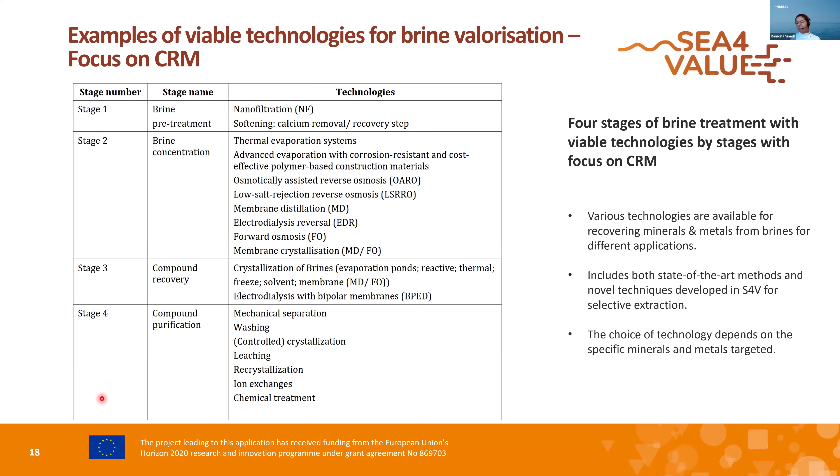In the next step, we were thinking about good practice approaches, and we said before we start planning, designing, implementing or operating the brine valorization unit, you have to check again the economic and market factors. You also have to check if the technology you want to use is efficient, if there are new technological innovations which could be applied and beneficial. As I said, logistics and infrastructure are something you need to consider, but also politics and environment, and of course the risk that you take.

And when it comes to planning, here you also have a lot of key factors which you should obey. Of course, you should check if the process as it is viable. You should check if you build it now on a greenfield, or if you build your new brine valorization field on a brownfield.

You should identify the brine that you're using and the minerals and metals inside, so that you choose which minerals and metals you want to recover, whether one or multiple. Then at the same time, depending on which country or region you are in, what governance and regulations should come along, and so on.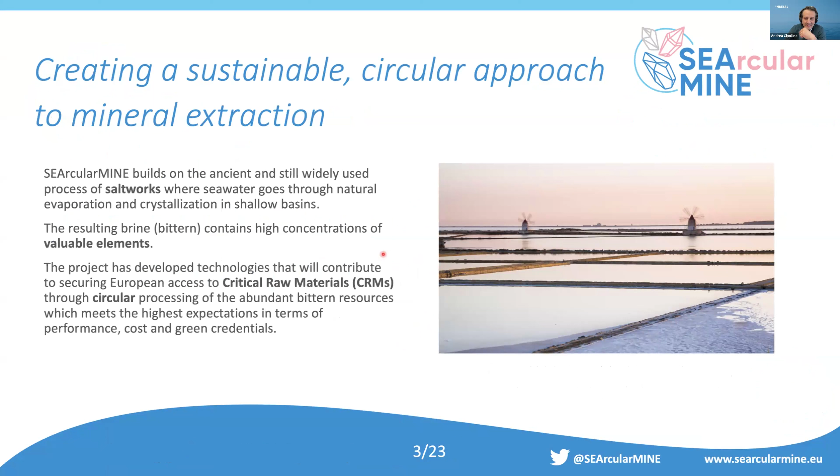Good morning. Thank you for inviting me to present the results of our project, the SEArcularMINE project, about the extraction of raw materials from bitterns. Bitterns are a very peculiar type of brine coming from seawater through a series of evaporating basins where sea salt is generated as a first product. But saltworks also generate a brine, very concentrated, extremely rich in magnesium and other valuable elements. The goal of our project was to develop technologies aiming at the recovery of these materials.

Some key facts on the project: it was closed last year. It was a 4-year project with a total budget of 6 million euros, coordinated by the University of Palermo with 12 partners coming from all around Europe. I need to mention the partners - they were from academic institutions, industries, small and medium enterprises. You can see all of them have contributed significantly to the success of the project.

The overall scheme we worked with starts from saltworks, the place where sea salt is produced and where the bittern is generated. From the bittern, we tried to extract as many minerals as we could with a fully integrated cycle, starting with recovering magnesium, but then we also looked at the extraction of lithium and other trace elements. What made the process fully circular is the in situ generation of reactants needed for the selective separation units. As a final step, we also tested reverse electrodialysis as a means to generate electricity from exhausted brines.

Last but not least, we also looked at the integration of currently operating saltworks with desalination plants. But in this case, inverting the concept a bit - not how to use the brine from desalination plants, but how to further enhance the productivity of an existing saltworks by constructing and integrating it with a new desalination plant. I will be fast in describing the technologies - you may have seen this already in other occasions.

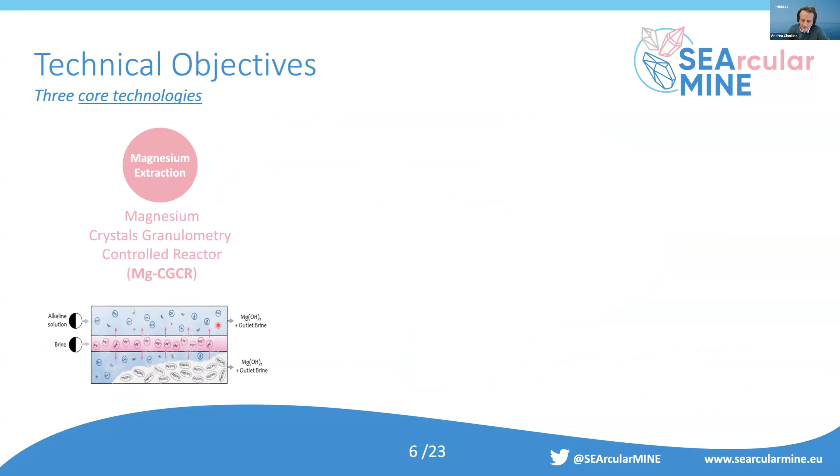We focused on 3 core technologies: the magnesium crystal granulometry controlled reactor, a patented technology aiming at the production of magnesium hydroxide with finely controlled granulometry and high purity; the lithium membrane flow capacitive deionization unit, developed by our colleagues from the University of Lisbon, Universidade Nova de Lisboa, based on lithium selective membranes; and the trace elements pH swing adsorption technology, developed by our colleagues at UPC Barcelona, aiming at very selective recovery of a number of trace elements.

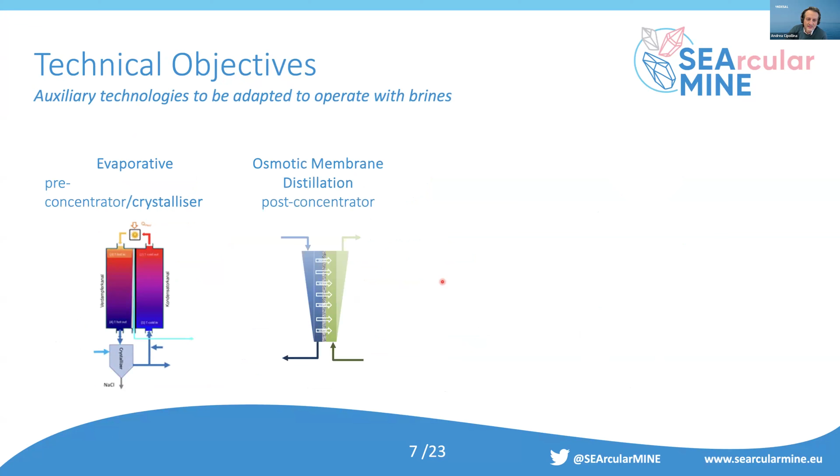There are also a number of auxiliary technologies that could be adapted to operate with brines. First of all, evaporative or osmotic pre- and post-concentration units. But as I said, one of the most important units, as it was the core of the circularity, was the EDBM - electrodialysis with bipolar membrane units - able to produce in situ the chemicals needed for the process, and reverse electrodialysis adopted for power generation from salinity gradient.

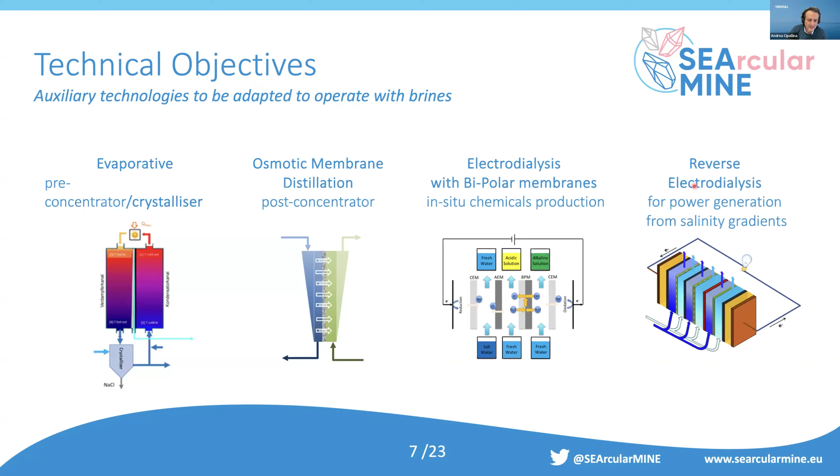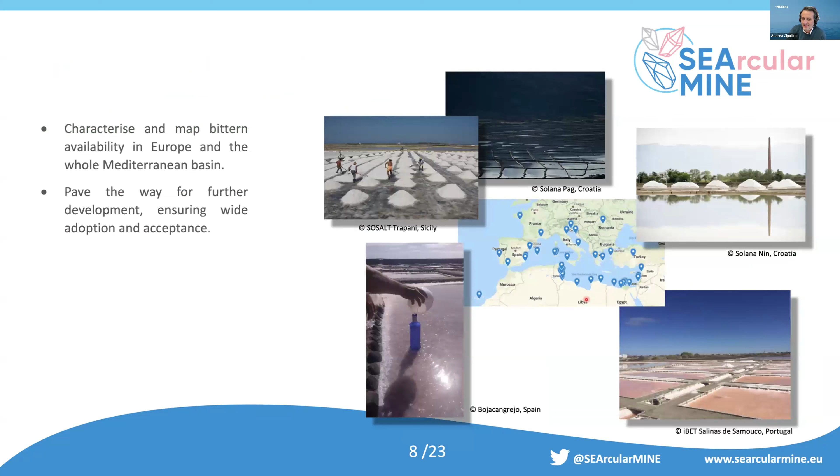Among the non-technical objectives, but also very important, we characterized the potential of bittern exploitation in the whole Mediterranean basin. This was performed by collecting about 30 samples from all around Europe, and let's say also North Africa and nearby regions, analyzing the composition and content in each targeted mineral.

These units were all fully integrated within a unique pilot plant that operated in Palermo at the premises of the University of Palermo with real solutions for a sustained period of about 4 months. We also ran long-run operations with continuous operation up to 70 hours of all units integrated with each other.

Some key facts, some key results in a nutshell. About magnesium recovery, the crystallizer was tested and proved to be able to produce about 100 kilograms per day of magnesium hydroxide, which is already a significant scale, with a process yield of practically 100%. All magnesium was recovered from the bittern, with a purity which was, in most cases, above 99%.

Concerning the trace elements separation, the pH swing adsorption technologies have all been tested and proven. We could demonstrate that boron, strontium, rubidium, and cesium were, for example, separated with high selectivity. We could also achieve perfect control of hardness in the brine reaching the EDBM, thanks to the pH swing adsorption unit, eliminating calcium and magnesium, which at the end of the treatment achieved concentration values below 5 ppm.

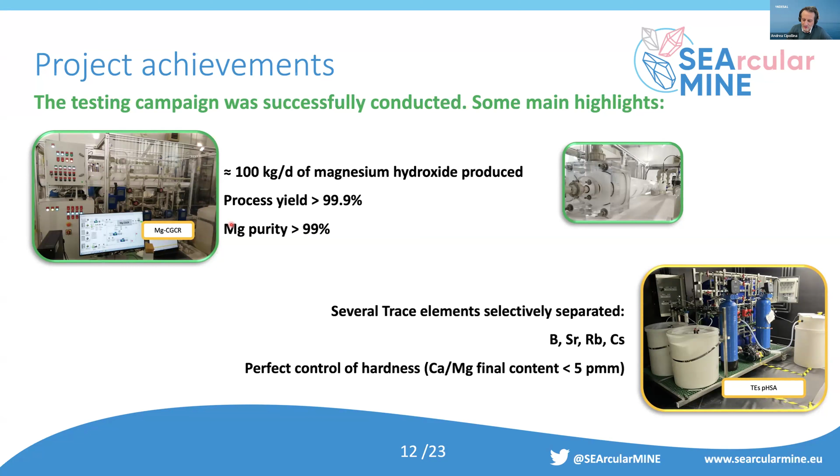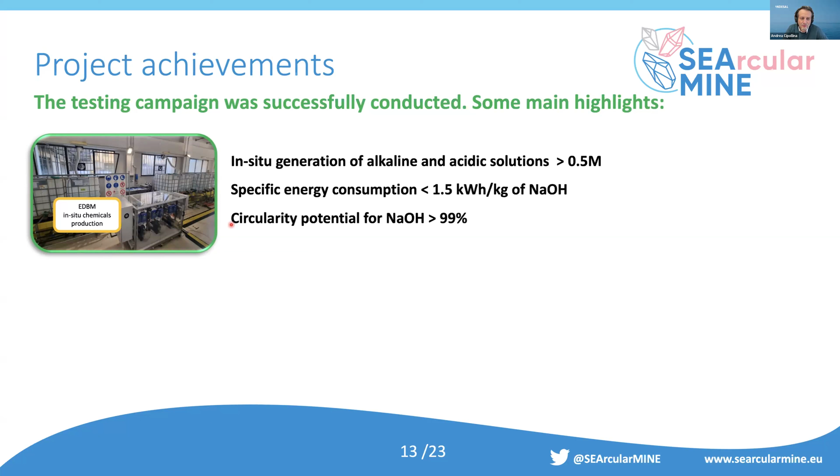Concerning the in situ generation of reactants, in particular the alkaline reactants, we could achieve very good performances. We generated the solutions we needed inside the process at a concentration typically between 0.5 and 1 molar, exactly as needed in our units, with specific energy consumptions well below 1.5 kilowatt-hour per kilogram of sodium hydroxide, and a full circularity potential for sodium hydroxide reuse inside the system itself.

Last but not least, the reverse electrodialysis unit was also tested, first at laboratory scale and then in a pilot scale setup, with interesting values of power density around 8 watts per square meter achieved in the lab scale unit, and lower, around 5 watts per square meter, but with a much higher conversion, around 30%, in the pilot scale setup.

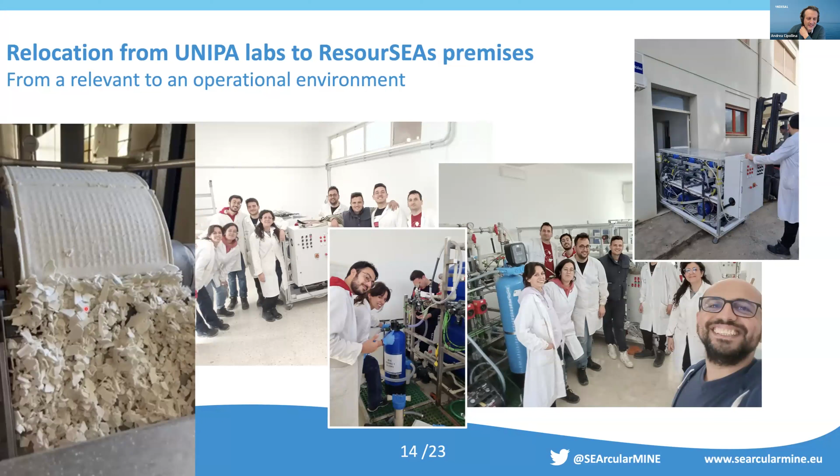These are some pictures I like to show with a group of people operating the plant in Palermo, and then also in Trapani, where the plant was moved after the testing phase in Palermo, at the premises of ResourSEAs, which is a spin-off company of the University of Palermo. This is a real picture of the drum filter where the magnesium hydroxide cake was filtered and generated.

If you want more information on the pilot plant installed at ResourSEAs premises, there is a very informal YouTube video that makes a virtual tour of the plant.

To close, I want to show you the next plant. The University of Palermo has been granted a new Life project, which is smaller and more focused on the specific case study of magnesium hydroxide production from saltwork bitterns.

The partners are local partners, University of Palermo, ResourSEAs, and MareMag, which is an affiliated partner to ResourSEAs, and Sosal, Nuova Sima, which are two Italian companies, and Hellenic Saltworks, a company in Greece, which will enable the reproducibility case in another saltworks.

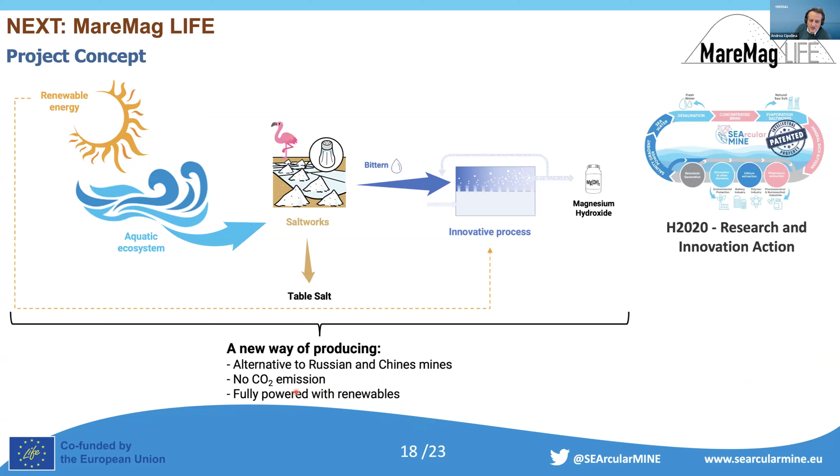The goal will be basically to show at a larger scale and higher TRL that the technology can be implemented to produce magnesium hydroxide in a new way, as an alternative to Russian and Chinese mines, with no CO2 emission and fully powered with renewable energies, in order to go closer to the market.

The main challenges we are targeting with this new project are to basically eliminate the use of harmful and environmentally dangerous products in two markets for magnesium hydroxide: the flame retardants market and the environmental applications market, substituting brominated flame retardants and calcium hydroxide respectively, plus the production of alternative compounds like hydrochloric acid and sodium sulfates for different but very wide markets.

The plan for implementation is to go from the 40 tons per year pilot plant realized within the SEArcularMINE project to a 100 tons per year plant at the first MareMag industrial plant in Trapani, in the saltworks of Trapani, a replication study of 50 tons per year capacity in Greece, in Kitros saltworks, and then, after the Life project implementation, the real industrial scale-up with a target capacity of 15,000 tons per year.

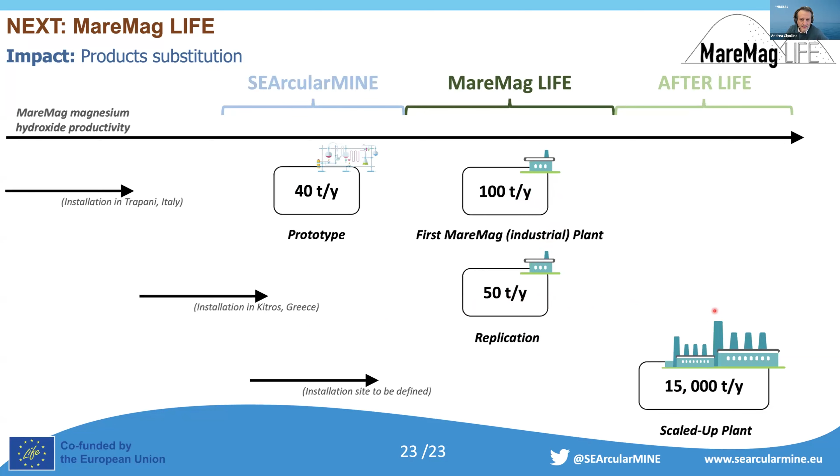With that, I close my presentation and thank you all for the attention, and I'll be glad to answer your questions.